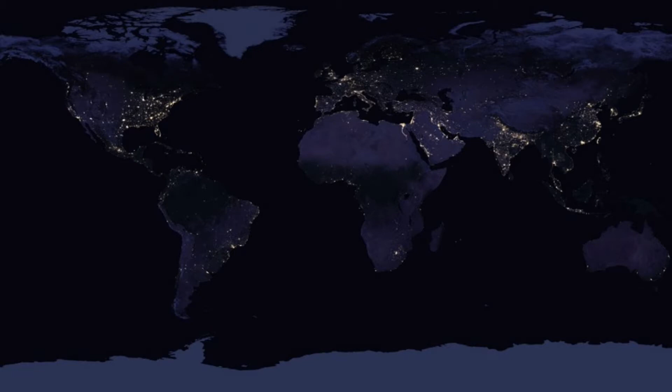Certainly. First of all, I'd like to point out that world electricity consumption has doubled over about the last 25, maybe 30 years. There's absolutely no reason to believe that it's not going to double again over the next 25 to 30 years, probably shorter. If one looks at Africa, Africa's consumption is going to double even quicker because there's a rapid rise. As you indicate in that diagram there, Africa needs electrification. So for South Africa, we have an objective that we need to double our electricity consumption. Many other African countries are as little as 10 to 20% electrified. The only honorable thing they can do is double their electricity consumption, then double it again, then double it again, and then probably double it again. So there's no reason to believe that there's not going to be a major increase in electricity consumption.

Now, in South Africa, we have the most southerly nuclear reactor in the world that is a power reactor. That's called Koeberg, and it is down in Cape Town. It's a large reactor of 2,000 megawatts. The big reactors need water cooling, and that is why they typically are found on the coasts where the sea is, or otherwise on the banks of very large rivers or lakes that have got a guaranteed water flow, which we don't have typically in Africa. So for us, what we need to do in South Africa is build big reactors on the coastline, and then because the country is so large, when we go inland, we want to put smaller units of about 100 megawatts.

So the small modular reactors are about 100 megawatts. You can make them smaller, 30, 40, 50 if you want to. You can also make them bigger, 200 or so. But I'm going to say 100 just for order of magnitude here, as against 2,000 of Koeberg, and the new big reactors or power stations that are coming out now are coming out at 3,000, 3,500 megawatts for a power station. So the small modular reactors are units of about 100.

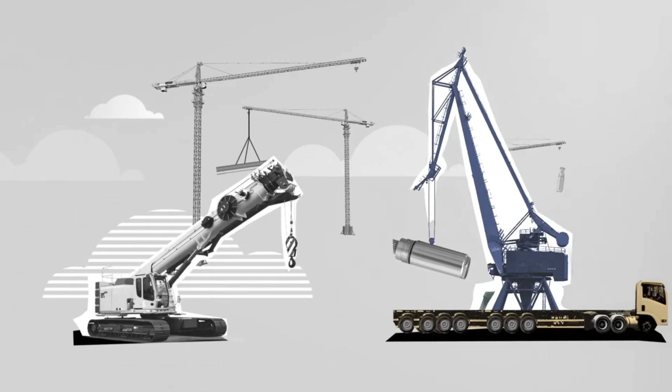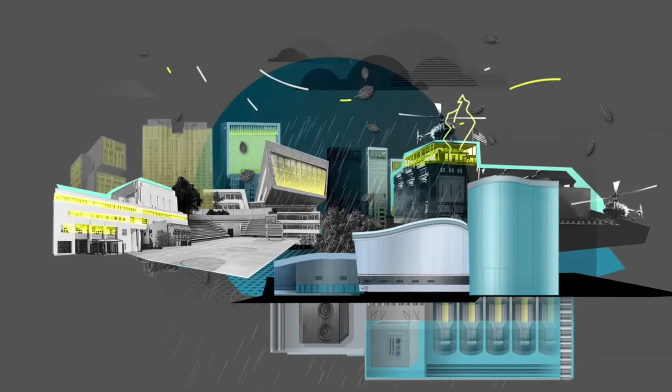SMRs are built to be durable and reliable. They are designed to shut down and cool autonomously and can be built mostly below ground, making them more resilient to extreme weather events. SMRs can operate independently from a power grid, supplying power to critical facilities such as hospitals, data centers, and military bases.

With fewer siting requirements and a flexible design, SMRs can provide needed utility service in a variety of regions. For example, one unit can heat and power a remote Alaskan fishing village, avoiding the cost and difficulties of transporting diesel fuel over hazardous terrain. Multiple SMR units can also be combined to help coastal cities and island communities regain power and fresh water after a storm.

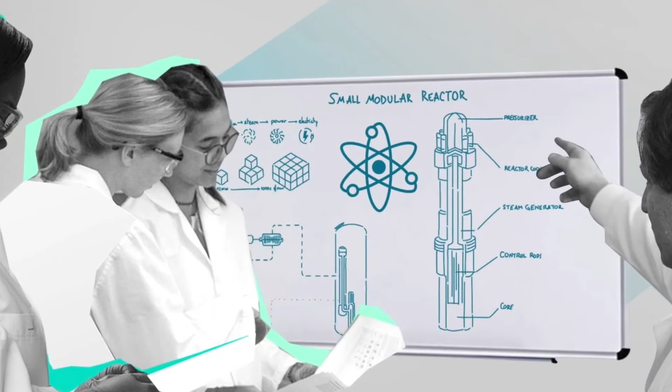The Department of Energy and its industry partners are leading the way to create and develop emerging nuclear technologies like small modular reactors. Technologies that will keep America in the forefront, meeting the world's energy demands and the planet's environmental demands.

Now, with the change of administration here in America, I think there's not quite as much excitement about nuclear as there was under the Trump administration. But there do remain some significant prospects for this. Knox, you work directly in the nuclear energy industry. What are some of the major differences between small modular reactors and traditional nuclear plants? And let's start out with size. Help our viewers to get a good grasp of the difference in size between a traditional large nuclear plant and a typical SMR.

Small modular reactors have really been defined as anything 300 megawatts and below. Anything in that range is officially classified as a small reactor. Modular, I think Kelvin has explained in a fair amount of detail. Just to illustrate the concept of modular, if we want to apply it to the nuclear industry, is to look at the aviation industry.

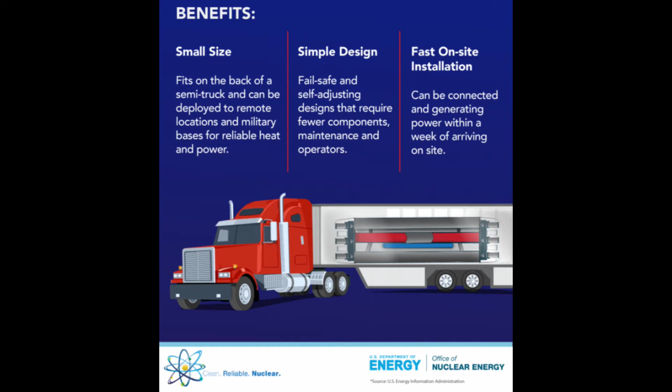How about function? What's the difference in function between SMRs and conventional plants? Either one of you can address that.

Well, maybe what I can point out is that the conventional large nuclear has quite substantial fuel elements. The fuel elements are metal tubes about as thick as your finger that are bundled together in groups that are about a foot by a foot and about 6 feet long, 7 feet long. I'm trying to convert meters in my head quickly to feet.

And these slide into the core of the reactor and typically last about 18 months before they're taken out. The power station manager has quite a bit of latitude as to when exactly he wants to take them out, because they take them out quite a bit of time before they're fully burnt up.

The fuel in a pebble bed reactor is a graphite ball, somewhat the size of a baseball, and in it, in the case of the South African reactor, it has 9 grams of uranium. The uranium is about the size of grains of sugar. Each of them are coated with a silicon carbide layer, and they're inside like a chocolate chip cookie inside this graphite. So the graphite balls are very much easier to move around and to store than those large zirconium tubes with uranium inside them. So that is a big factor.

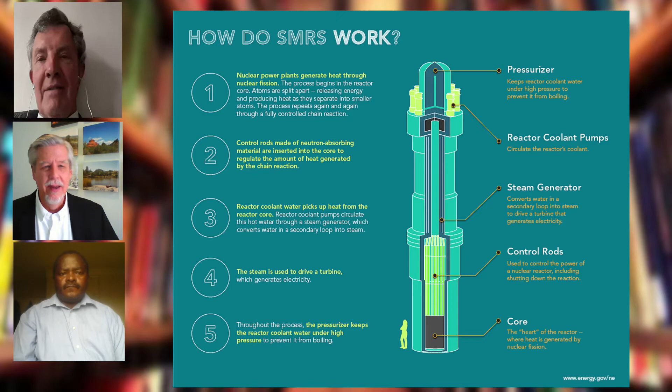Yeah, that is a great message for the public to get, because, as you know, green organizations have been touting the idea of risks from nuclear radiation from nuclear plants for a long, long time. Actually, nuclear energy has the best safety record of any electrical generating process.

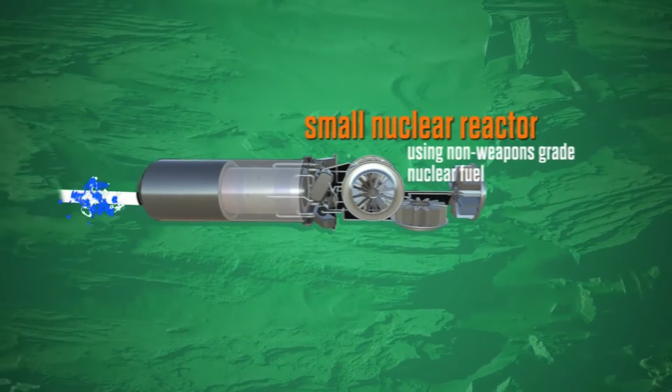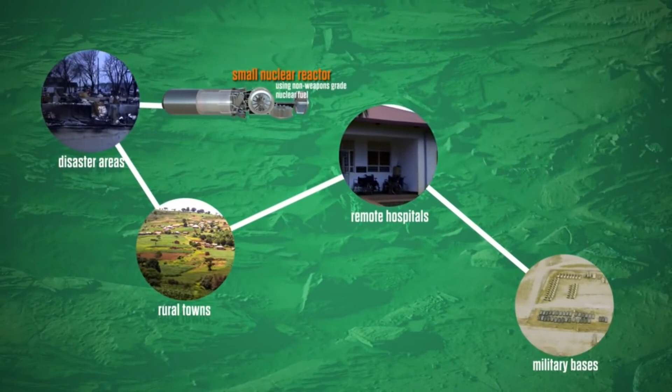What if we could use a small, portable nuclear reactor to provide power to disaster areas? Or rural towns far beyond the reaches of power lines? Or hospitals in remote parts of the world? Or military bases in the most remote, challenging locations? Los Alamos National Laboratory is developing the technology to do just this. The small reactor uses heat pipe technology to generate 1 megawatt of safe, reliable power. That megawatt can power approximately 1,000 houses.

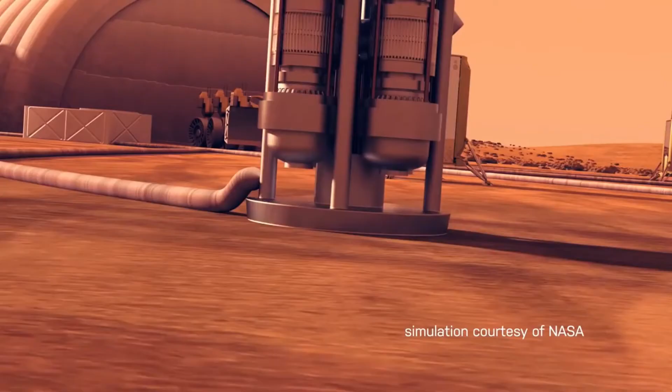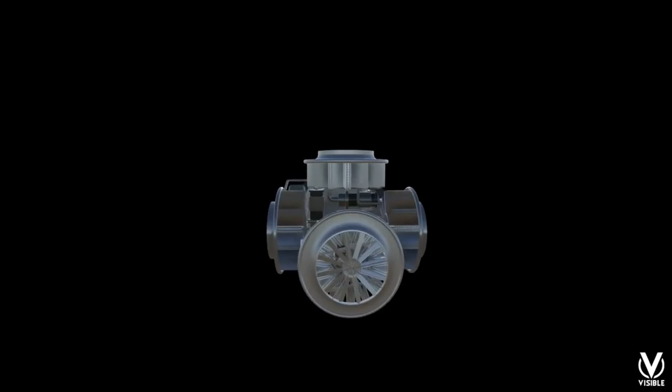The entire system will fit on the back of a semi-truck in a robust container to ensure its safety and make it easy to transport to remote areas. This technology sprung from Los Alamos' work to develop a small nuclear reactor for NASA that might someday power a colony on Mars or the Moon. So we asked the question, how could we use this same technology for Earth-based purposes? To answer that question, Los Alamos partnered with the power company Westinghouse, which will use the technology to manufacture the reactors. In less than 5 years, it should be ready for deployment, helping to support humanitarian and military missions and saving lives in the process.

Just before that little break there, we were discussing the safety of small modular reactors and comparing that with large conventional reactors. And again, I will emphasize, even the large conventional ones, even back to generation 2, like Fukushima, whereas we're now in generation 4, are extremely safe. The whole worry about hazards is hyped far beyond reality.

But I found at the US Department of Energy an interesting little article called "What Should I Do If a Small Modular Reactor Loses Off-Site Power?" That was actually one of the problems at Fukushima, that they lost power supply from an off-site point because of the earthquake and tsunami there. And interestingly enough, this article answers absolutely nothing. Small modular reactors, or SMRs, are setting a new standard for safety in the industry.